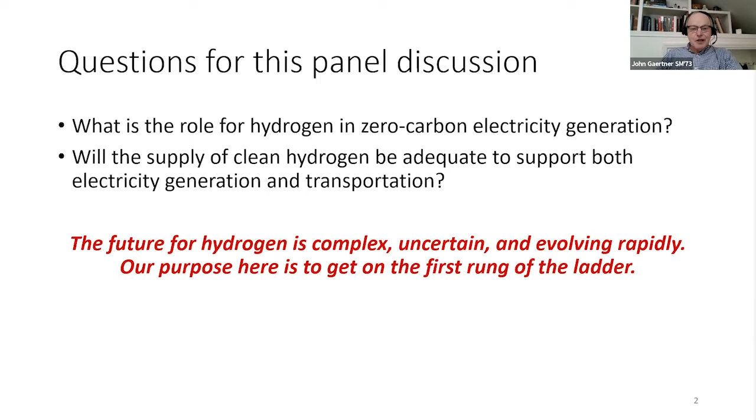This is a picture from the Department of Energy NREL laboratory, the Renewable Energy Laboratory, and it depicts what the low carbon hydrogen economy should or could look like in the future, say 2050, when we expect our energy environment to be quite clean of carbon.

If you step back and focus on that large blue circle with H2 in it, the picture begins to look like a distorted wheel, with that H2 circle being the hub, a hydrogen hub, and all around it are applications and interfaces to that hydrogen hub.

On the right, the lower right-hand corner, are three purple circles that really depict the current use of hydrogen. Almost all of hydrogen is used today in the chemical industry, the petroleum refining industry, and for fertilizers and ammonia.

If you look in the upper right, those depict the transportation usages, which are quite low today but expected to grow. The rest of that circle is distorted blocks representing interfaces with two major energy infrastructures: one is that big red circle, the electric grid, and the other is that large tan circle on the bottom, the gas infrastructure, representing pipelines, storage facilities, and blending facilities.

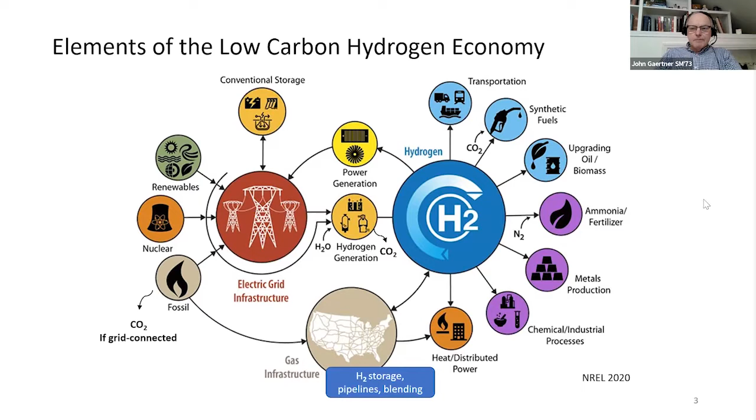This slide begins to answer our first question: what is the potential role of hydrogen in electric generation in the future? The left-hand side shows the first half of this relationship, called power to hydrogen. Hydrogen, as such, exists everywhere in the universe, but it's not in any useful form on our planet, so we have to make gaseous hydrogen from water or other chemical reactions. Two ways of doing it are depicted on the left of this chart.

On the top, we can make hydrogen using clean electricity. Renewables - wind, solar, or geothermal, or nuclear power - are candidates to take either excess electricity or low-cost electricity, because it's not needed at the moment to cover the electricity grid loads.

We use that to power an electrolyzer. Remember high school chemistry when we stuck two wires in a beaker and watched the hydrogen and oxygen bubble up? Well, these electrolyzers do the same thing, but in a much more sophisticated, technically advanced way. They're highly catalyzed reactions. They might use high temperature steam, especially if they can get very high temperatures, say from a nuclear reactor, and they create that hydrogen.

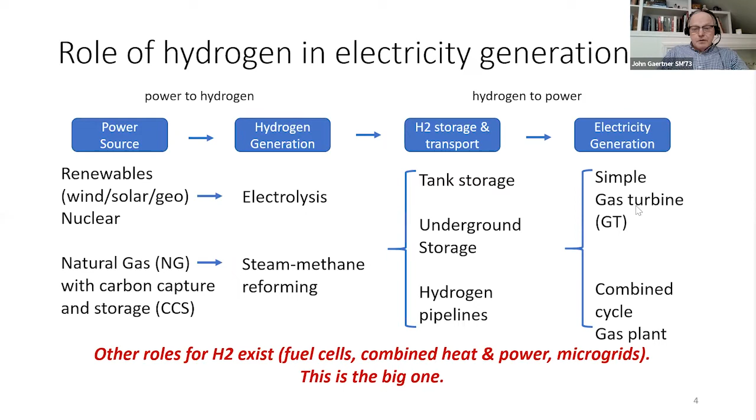So the next question was how much hydrogen is needed for electricity, say by 2050. One could do some back of the envelope calculations from data available on the web, but those don't work in these complex systems. You really need sophisticated modeling and simulation. And luckily, there are people doing that modeling and simulation.

I'm going to use one case study to make our point about how much hydrogen is needed. Duke Energy, which has a service area in the states of North Carolina and South Carolina in the United States, and they have a much larger service area, but this particular case study I'm looking at just those two states. They did a sophisticated modeling and simulation analysis, and they came up with what they thought their generation mix would be in 2050, and that's indicated in that top box.

You'll see that renewables and nuclear energy will make up the majority of their generation, and that's clean already, so we don't need to mess with that. The second line shows that there's two other components. One is advanced generation, which they call ZELFRs, which stands for zero emitting load following resources. And that's a type of generation. It's very important to the utility, but those technologies don't currently exist. And hydrogen is one candidate to fill that need.

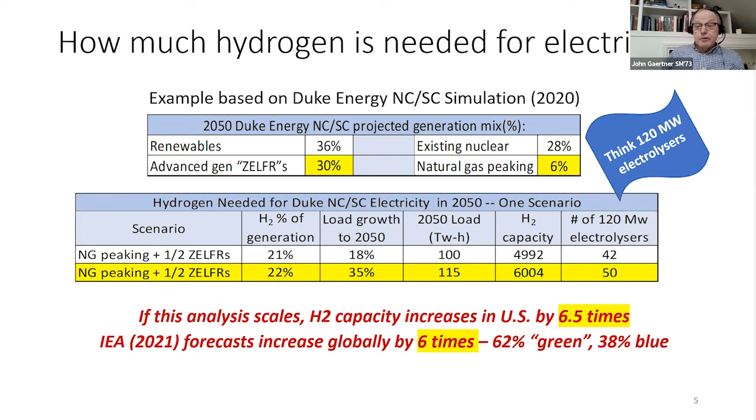Next slide, please. If we add transportation in, we're not blessed with that kind of knowledge because we don't have good modeling and simulation, because we don't have consensus on exactly how hydrogen is going to be used in transportation. But we do believe that most of light vehicles will be electric. And we do have projections, as I indicate on my red sentence, where utilities have projected how they would handle that in 2050 if 90% of light vehicles were electric. And we already know the hydrogen impact of that because we calculated that on the last slide.

So light vehicles are not going to be an additional problem for the electric utility industry. Medium and heavy vehicles, and that includes rails and marine shipping, however, is a bigger problem and may not be able to be electrified. Maybe it might go directly to hydrogen.

And if it did, that would cause our requirements for hydrogen to go up by an additional 20%. So an additional 20% of the 600% that we're predicting. So again, it's a big lift, but it doesn't sound, since the 600% is already a big estimate, it's sort of round off error to add another 20% onto that. So again, it isn't an alarming number, but certainly a challenge. Next slide, please.

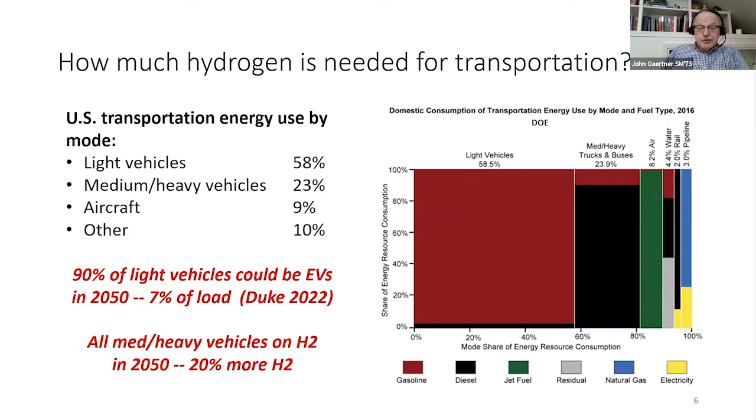So I think we answered the 2 questions to the best of our ability, but I wanted to bring up a couple of important issues. One is the cost of green hydrogen. It's currently in the range of $3 to $6 a kilogram to make, and it's projected it needs to be $1 to $2 in order to be cost effective commercially. The good news is the Department of Energy has that as one of their goals for this decade, to reduce that cost to the $1 to $2 price range by 2030.

The second issue is the one I brought up earlier, which is if we're going to use natural gas, which currently makes almost all the hydrogen, along with green hydrogen, we need to learn how to capture the carbon from it. Now, it's easier to capture carbon in a steam-methane reforming process than it is in a power plant, because it's much more concentrated. So that is hopeful, but we don't have commercial means to do that today.

And finally, we're going to need to have these hydrogen hubs so that we have an infrastructure in order for this to happen. Electric utilities are not hydrogen companies, and transportation companies are not hydrogen companies. So we really need an infrastructure to be built.

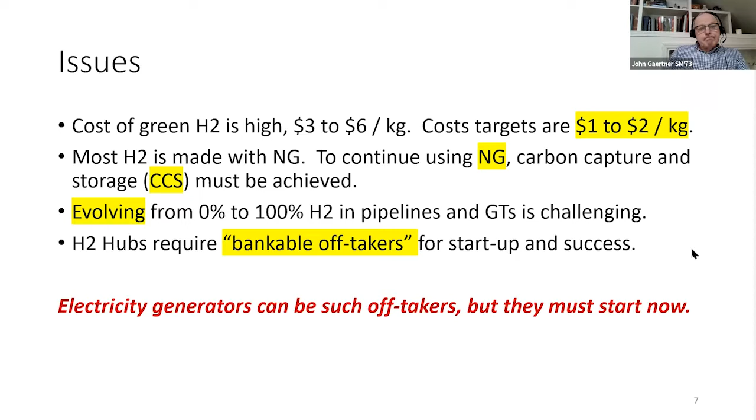So in conclusion, I think that we've shown that hydrogen can be a bridge to carbon-free electricity, although a challenge. We've shown that we would need to increase the amount of hydrogen we currently make by 2 to 7 times by 2050, but we have the technology, or the technology in progress in development, to do that.

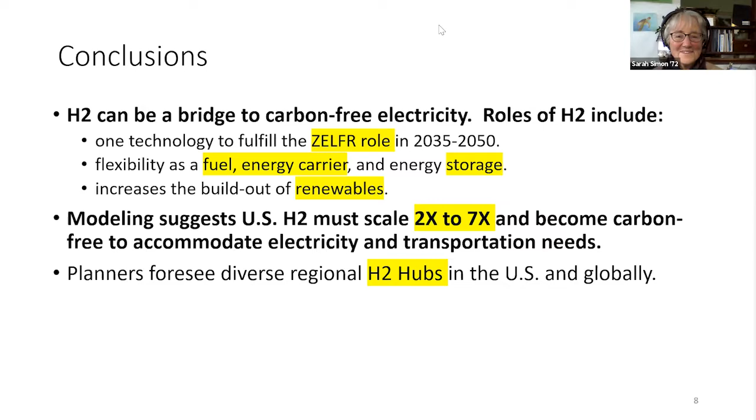And finally, we will need these hydrogen hubs to develop the infrastructure, and those are in process. I think Jeff's going to talk a little bit about that, and if he doesn't, we'll have time in the discussion to answer any questions you have on that. So that's what I have to say about that. Thank you very much.

That's great. Now we're on to Jeff. Let's see what kind of slides he's got. There we go. Thank you. Okay.

Well, thank you very much, everyone, and it really is a pleasure to be here. Thank you, Sarah, Amy, and Ramon. And John, thanks for that presentation.

I wanted to talk a little bit about what I believe is a great opportunity with gas turbines utilizing hydrogen as part of the fully decarbonized grid. But I wanted to just quickly give you an idea of my company. As Sarah mentioned at the beginning, I work for a company called PSM, Power Systems Mfg. We're based in Jupiter, Florida, but we are a global company.

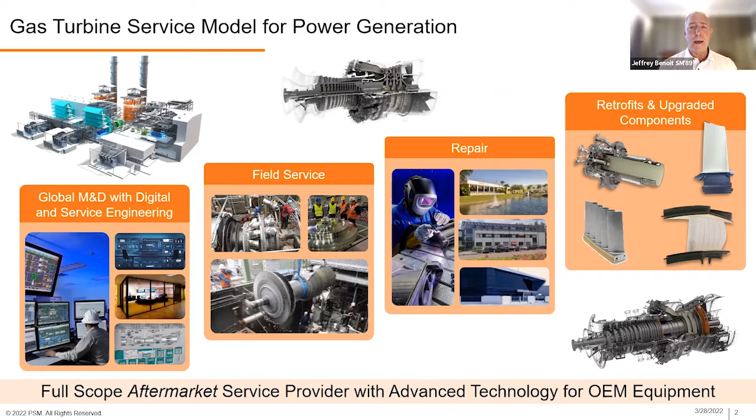We are an aftermarket service company for the global fleet of gas turbine power plants. So we perform the services on OEM gas turbines. If it comes from GE or Siemens or Mitsubishi, we have the ability, with our own technology, and have had for the past 20 years, to offer our own solutions to help our customers maintain their business objectives and their profitability, as well as their reliability.

One thing that we've noticed with our customers is a strong focus over the past 2 to 3 years on environmental, social, and governance rules, ESG, and sustainability plans. With the sustainability plans, they talk about a reduction of the carbon intensity of their power generation assets. Many of them have set 2030 objectives, and many have set 2050 objectives, with many saying net zero by 2050.

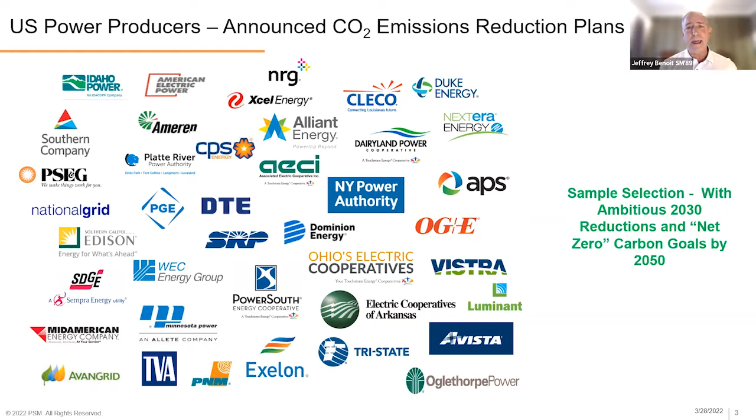What has changed in the past year is a movement forward in looking at how tangibly they can begin to address the remaining assets in their fleets. Many have retired their coal plants. Many have installed much solar and wind. That's one way; efficiency upgrades are another. The one remaining piece is how can you get the same type of carbon intensity reduction with gas turbines? Well, I'm going to build the case for it.

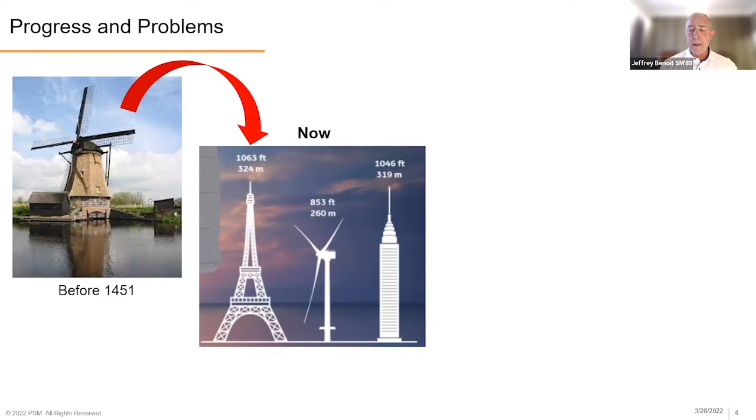If we look at what we're seeing in the renewable world, where we've gone from decades ago to today, we now have 14 or 15 megawatt wind turbines that are offshore and providing power. And then we also have photovoltaics — in this particular case, a 10 gigawatt field in Australia being used to generate electricity.

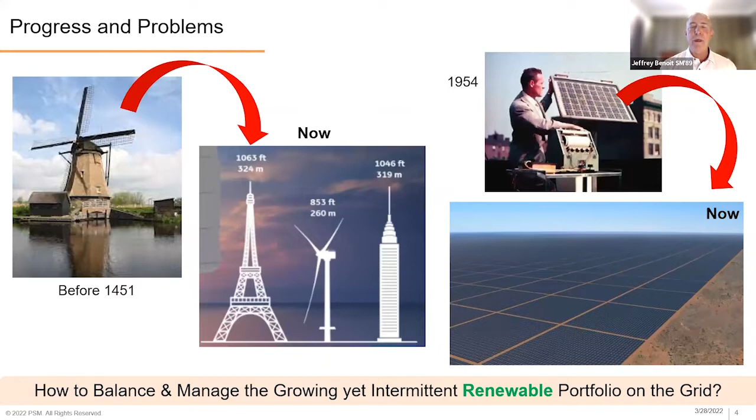So what do you do with this highly volatile, intermittent power? How do you back it up so that your lights stay on, and do it on a grid scale? Well, I believe the way we're going to be able to do this is with the gas turbine. First of all, it's very flexible — it's dispatchable.

Natural gas in a gas turbine is one of the cleanest of the fossil fuels, and gas turbines are very versatile when it comes to fuel, such as hydrogen. One thing with renewables is sometimes you can't use it all. Wouldn't it be great as an energy storage mechanism to take that excess renewable energy and, through an electrolyzer, generate hydrogen, using that as a basis for energy storage that can be released on the grid through gas turbines when you need it.

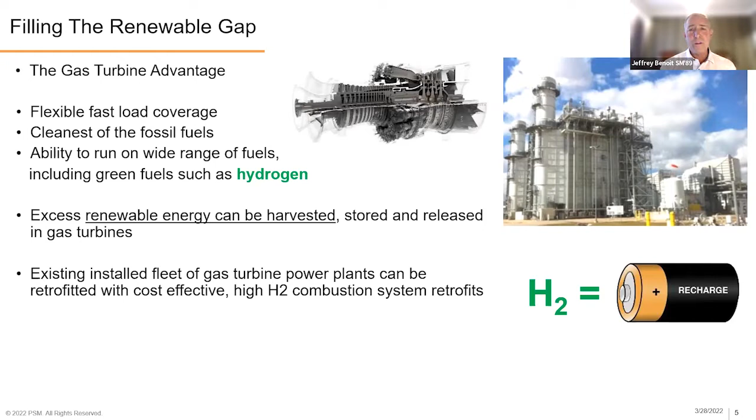We're also focused on retrofits for combustion gas turbines. This is a way to do it, but remember, it's going to take certain regional market drivers, global market drivers, and legislative policies to help frame up this hydrogen value chain.

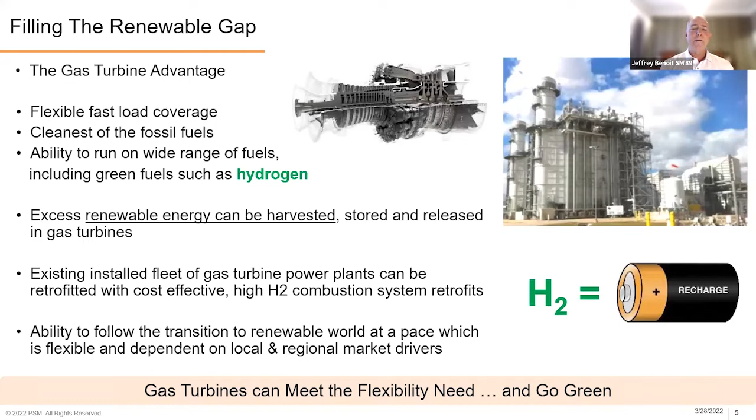Now I wanted to show you a bit of the opportunity with hydrogen. I have pictures here provided courtesy of TU Delft, one of the universities we work with here in Europe, where I am this week. First of all, zero carbon emissions with hydrogen, but you have to worry about oxides of nitrogen, which is a concern. This again allows us to balance the flexibility needed for the grids.

Here in Europe, there are tremendous amounts of wind and solar being put on the grid. Gas turbines are the natural way to do it. The challenge, as John brought up, is the high cost of production right now, but recognize that the hydrogen value chain is nowhere near the scale we currently see with renewables, and it needs to follow that process.

What we're seeing is tremendous investment for blue hydrogen as well as green hydrogen. One thing I'll tell you is blue hydrogen will be the bridge to green hydrogen in the United States, primarily because we have so much natural gas, it just makes sense.

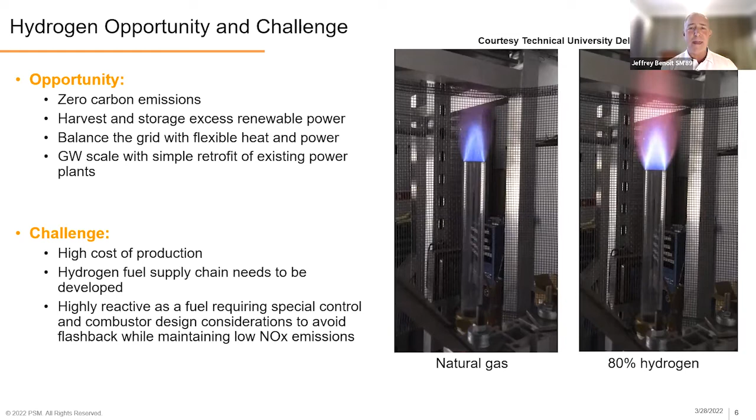I wanted to show you this, just look at the flames as they move. The left is natural gas, the right is hydrogen. Look at how quickly the hydrogen flashed back in that tube. That's one of the challenges if you're looking at using existing combustion technology rather than starting on a new platform.

One thing to understand is the typology of hydrogen, and we're going to focus on three: green hydrogen through electrolyzers, blue through steam methane reforming of natural gas, and nuclear power, curtailed nuclear that could be used through an electrolyzer as well. I'll give a couple examples of white, which in many cases is refinery off gas.

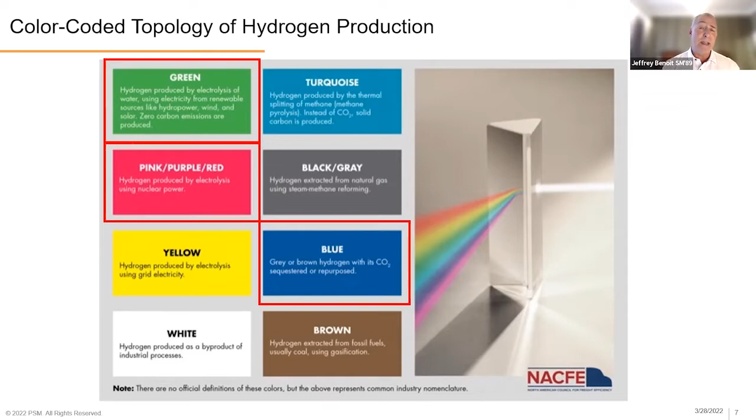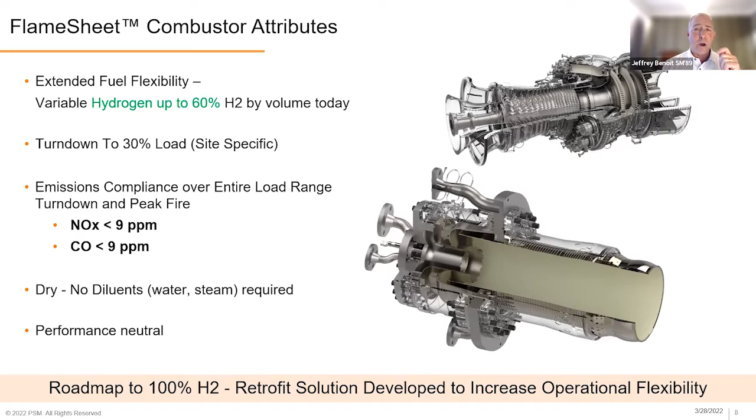I'd like to introduce a retrofit combustion technology we're working on, called the FlameSheet. It provides tremendous flexibility for customers today, and it's being installed today for tremendous range improvement in terms of operation. But it's also future-proof because it's highly capable of handling a wide variable blend of hydrogen, today upwards of 60% hydrogen by volume, which is about a 28% reduction in carbon intensity. So this does provide a way to future-proof the existing installed fleet of gas turbines.

Just to give a little technical background, it's a unique platform. It utilizes 4 different fuel circuits, just like stages in a car transmission. It has 2 recirculation zones where the flame is anchored in the combustor, done with a trapped vortex method, which gives it very good stability margin. On top of that, the velocities inside are very, very high, which is helpful because of the high reactivity of hydrogen.

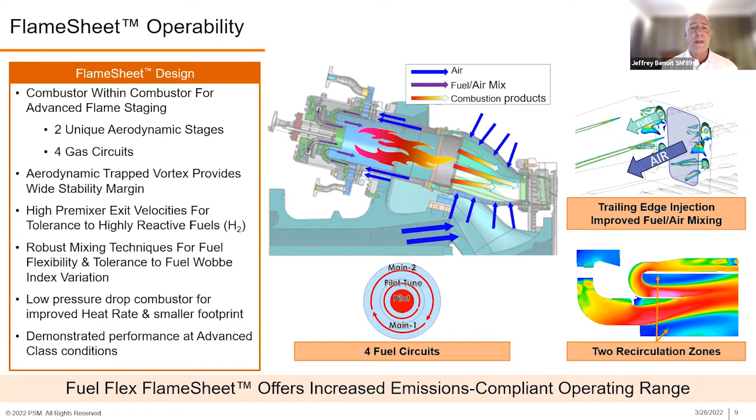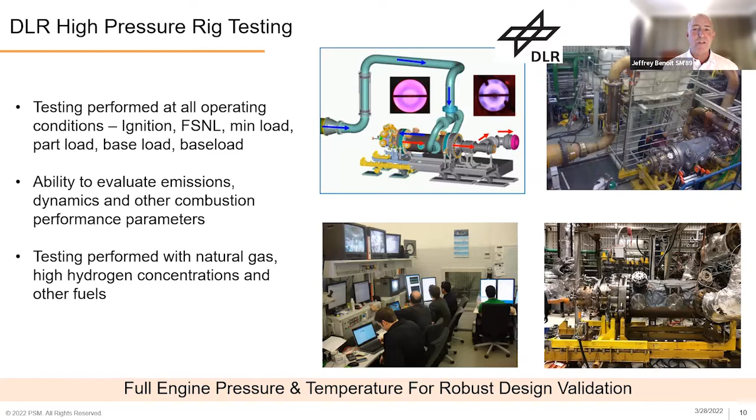This can be dropped in right into an existing OEM gas turbine, and we're doing that today. One of the things we have to do is push these designs as far as we can, sometimes to the point of destruction, and you don't do that in a customer's gas turbine, you do it at a test facility. We utilize a world-class test facility to test these combustion system retrofits at full condition across a myriad of operating conditions and fuels, from hydrogen, natural gas, liquid fuels, and now looking at ammonia as well.

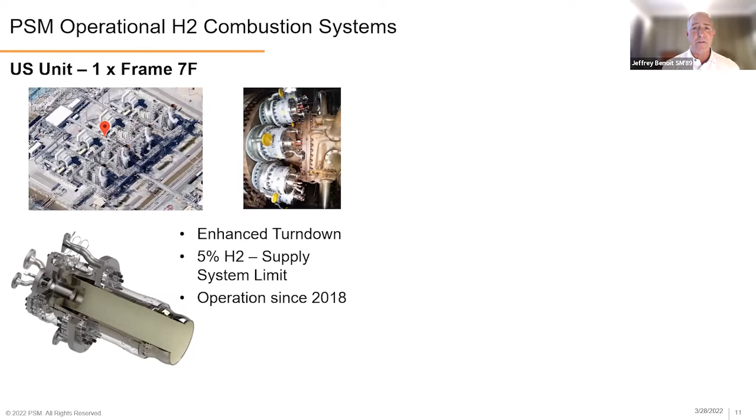This is where we push the design, so when they go into a customer's machine, we're confident it'll work. We currently have these combustion platforms operating. This is a gas turbine in Louisiana, only operating 5% hydrogen by volume, limited by what's being provided by the chemical plant next door. Another chemical plant with a power plant right next door generating steam for chemical processes has a variable 0 to 25% hydrogen by volume, but we've tested it up to 35% very successfully, with very low NOx emissions. That's the real key here—we're not reducing NOx emissions with water, this is done as a function of the technology, and we're doing it dry.

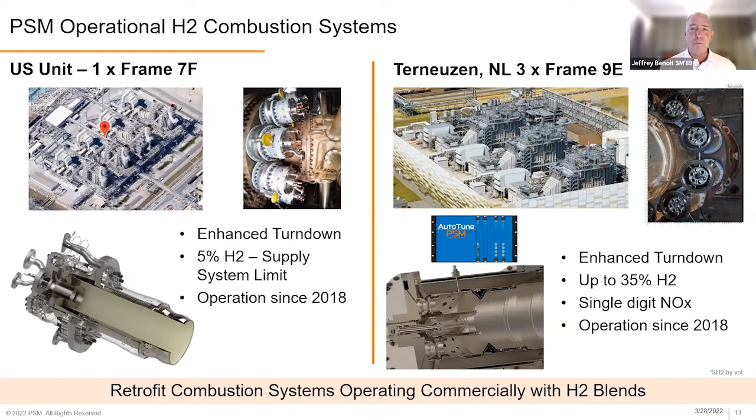In terms of the FlameSheet platform, we have 10 of these installed already in the United States. It provides not only significant improvement in operational range, but very low NOx and CO emissions. And it has the capability of up to 60% by volume of hydrogen today.

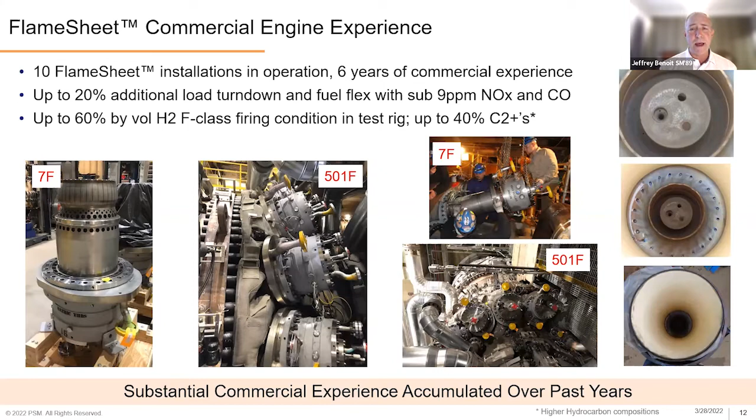Some very exciting news for this is how do we push it further? I mentioned 0 to 5%, 0 to 25%.

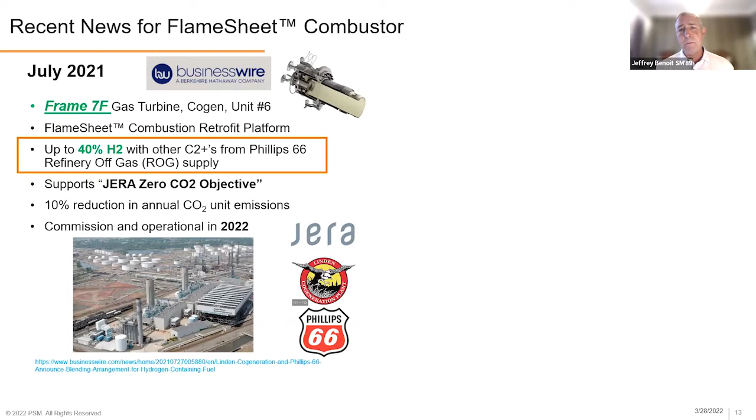We do have a customer in New Jersey, JERA, that will be installing this flame sheet into a gas turbine, which will be provided refinery off gas from up to 40% hydrogen by volume to achieve their decarbonization objectives. So it supports the Phillips 66 refinery as well as JERA's zero CO2 objective.

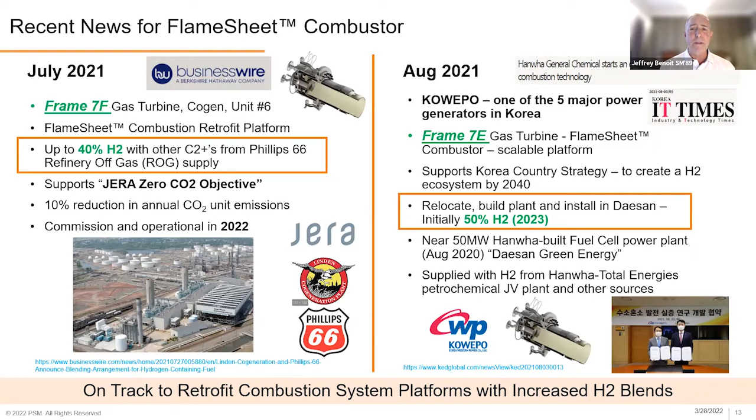And then also with our parent company, we are building a power plant that will utilize this flame sheet combustor, and that will look to push it to up to 50% hydrogen by volume. Again, that will be with refinery off gas, and we're doing that with KOWEPO, one of the power generation entities in Korea. So the question is, of course, I want to fully decarbonize gas turbines.

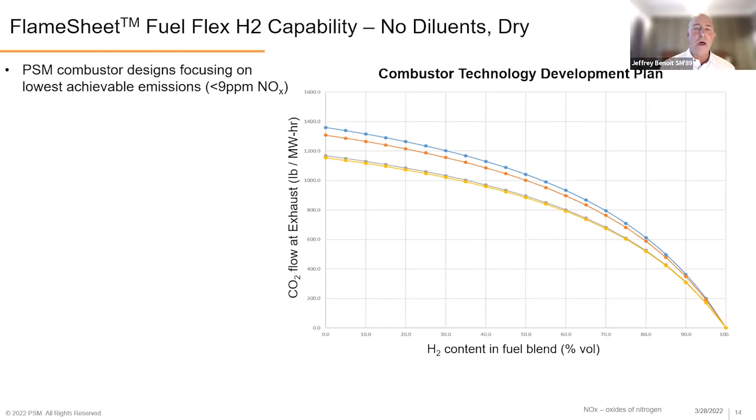They can be and will be fully decarbonized. They must be, to be that underpinning firming capacity for renewables. The more renewables that go on, the more volatility one gets in the grid. You need that dispatchable method and energy conversion device, such as a gas turbine, to take care of the volatility. And with 0 to 100% hydrogen, in this case 100% hydrogen, you now have fully decarbonized that asset. So it is similar to what a renewable is in terms of its carbon signature.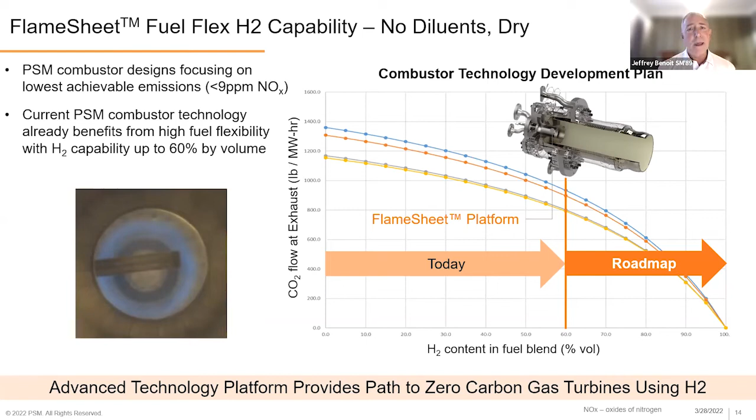Today, as I mentioned, we're looking at 60%. We do have a roadmap towards 100% that we're actively pursuing. Many in the industry are talking about 2030 to be ready with this type of combustion system for new gas turbines. We see the entire fleet of installed gas turbines around the world that can support this type of combustion system, completely retrofittable. It's simply a matter of where do we get the hydrogen, which is the challenge I wanted to talk about.

One of the things, actually two things that we're seeing now. One is a huge push by the administration to set up hydrogen hubs. This is $8 billion to effectively kickstart the hydrogen value chain, that supply chain, and all of the challenges needed to drive cost down, scale up, technology in, to drive to $1 per kilogram of hydrogen within a decade.

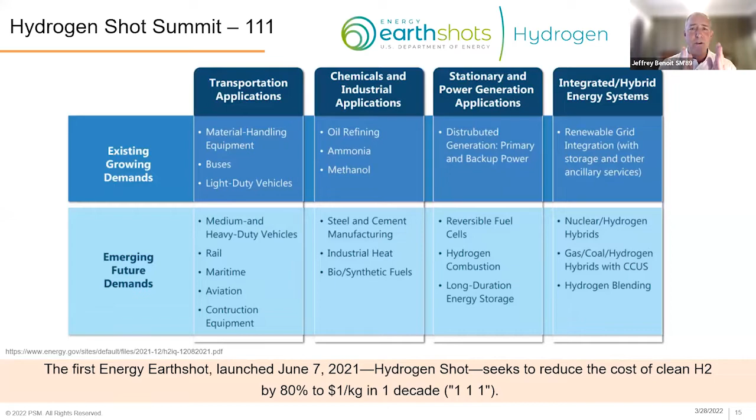And that will put it within the realm of competitiveness, and recognize that there will need to be a carbon mechanism, a price on carbon, if you will, what I call a price to pollute, which will also be part of that. But again, it's across not just power generation, but industrial applications, transportation, and where the focus areas are going to be. So we're very excited about that.

Finally, one of the things here today—granted, the huge amount of hydrogen isn't available at scale yet—but with refinery off gas, that's the low-hanging fruit. We have tremendous experience there. What I would tell you is that we are at the pilot and demonstration stage, and we're seeing operators and customers coming to us looking for these type of demonstrations. What they want to see, and need to see, to support their sustainability goals, is to be put on a very reasonable, well-thought technology pathway to fully decarbonize that asset.

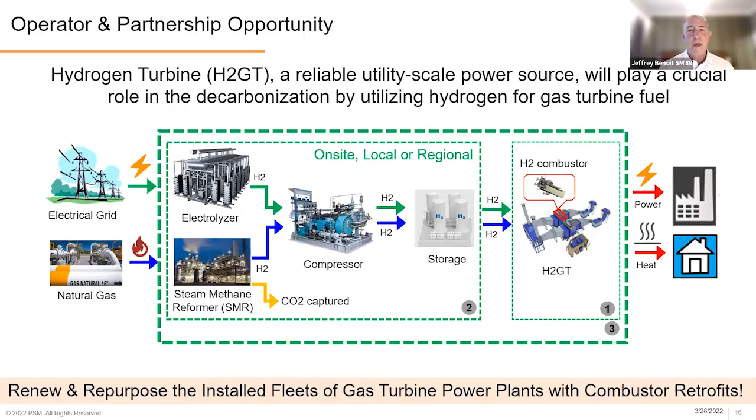It would be a shame to simply not use it and decommission it when it can be repurposed and revitalized for the future. And with that, I'd like to thank you very much for your time, and I look forward to questions that you may have. Thank you.